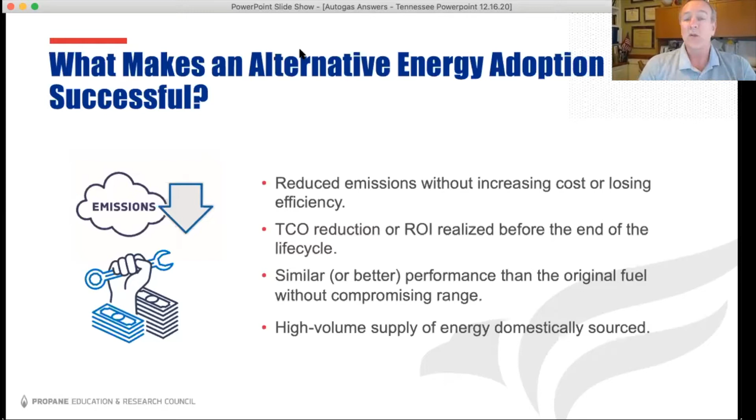It has to perform just as well, if not better, than what we're doing with our current gasoline and diesel today, without compromising on range. And then lastly, most importantly, we have to have a lot of this energy source available to displace what's currently out there.

So how does propane autogas measure up? We're going to show you today it's the most cost-effective way of reducing the most harmful emissions, NOx, across the whole spectrum. We have the lowest cost of ownership of any fuel, including the conventional fuels out there today. And we have at least as good performance—I think you're going to see actually increased performance—without compromising on range.

I'm hoping Billy will tell us about the tank sizes on his buses, because if he has those 400-mile range buses, then you don't even have to worry about it for the field trips and such.

And of course, we have more propane in these United States than all other countries combined. We are the leader in the world for propane production. We used 9 billion gallons of it last year, but we had a whopping export of 19 billion gallons. With all of you attending today converting your fleets over to propane, we're going to knock that down a notch by the end of today's session.

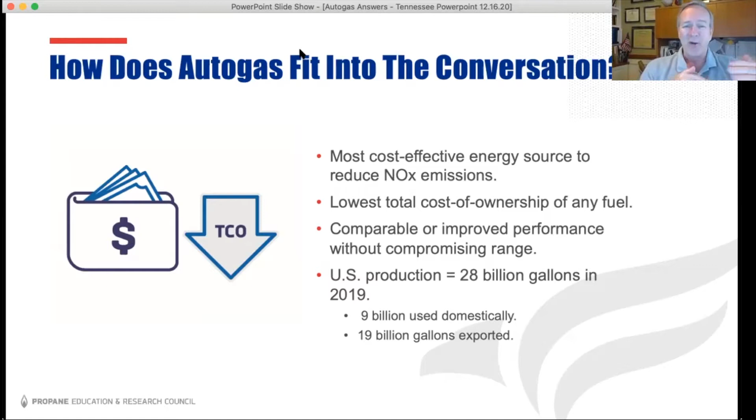So what is this propane autogas? Why do we call it autogas instead of propane—is it something different? No, it's exactly the same fuel that we have out on our patio firing up our grills to cook our hamburgers and steaks.

It's extremely clean, or we wouldn't let it touch our food. But we use it in millions of homes throughout the United States for heating and for agriculture on farms. Tremendous amount of use in forklifts for decades, because it's always been safe to use inside warehouses, since the emissions don't kill people like some of our other more dirty fossil fuels. And then it's in a lot of off-road applications as well, especially in the commercial mowers.

But it is the exact same fuel that we use. We have two sources of propane. One is an organic source, and that's the vast majority of where we're getting it, coming right from our own soil. But we also have renewable sources that we're going to talk about at the very end, on our pathway to zero emissions and greenhouse gases.

Both of them are the exact same molecular structure. They're non-toxic. It can't contaminate air, soil, or water because it doesn't spill. As soon as it hits the atmosphere, it actually evaporates, so you can't have any of that contamination.

So why are fleets choosing it? Well, it's about the money. That's at the top of the list. It's way less expensive than what we're using now, and it is much cleaner.

I'm hoping Billy will talk a little bit about the driver experience that he's having, because that noise is quite a new factor when folks are going from a diesel bus to a propane bus, because drivers actually get to hear what's going on their buses.

But of course, they have less maintenance. We'll talk a little bit about that. Improved corporate image - going green is very, very popular, but the employee morale for driving propane powered vehicles and that driver retention has been astounding. We'll get into a little bit of that too.

Every single alternative fuel has a path to zero emissions. Now, none of us will ever achieve really zero emissions, because there's an emission from tire wear, there's an emission from brake pads, there's an emission from everything on a vehicle that's moving down the road. But we're all striving to get as close to zero as we possibly can.

So how has propane measured up? Well, when we first got started, we noticed a huge reduction in particulate matter. This is something on a diesel bus where you have a particulate matter filter because that particulate is so dangerous to our environment.

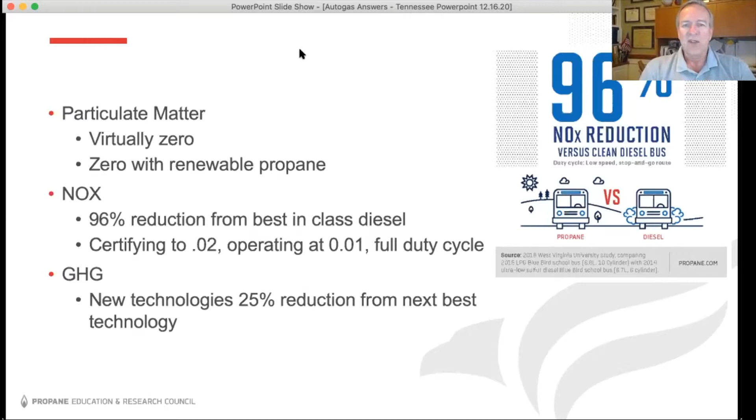Greenhouse gases is the other one. Our new technologies are making great headway in this with their efficiencies, and I'll talk about that when we get to it. And we are also doing a lot of headway with the renewable propane we'll get to.

Now, fuel and maintenance costs. Happy is going to be talking about fuel and prices, so I'm not going to steal his thunder, but it just gives you some ideas of how well it is. But I will talk a little bit more about the savings we have on the maintenance side.

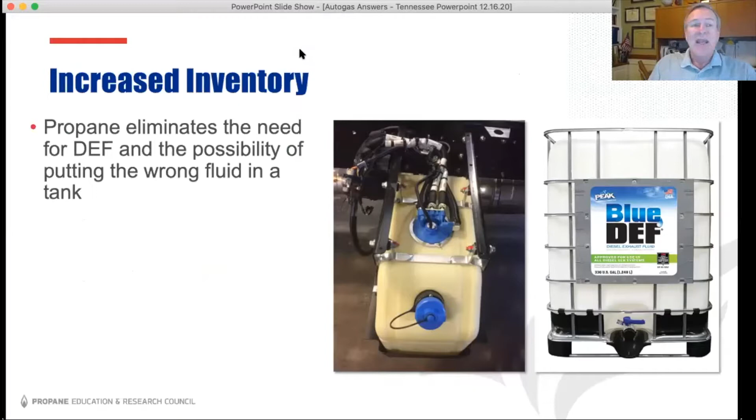Because with a propane bus, it operates so clean, we don't have to have all of the diesel after-treatment that our diesel engines are required to have to meet any of these particular standards, including the diesel exhaust fluid that gets mounted on there and all of the diesel emission reduction equipment that is necessary to make this happen on a diesel bus.

In 2024, there's a new set of lower emissions that these engines are going to require, and it's going to be even more equipment and more cost to maintain on diesel buses for the 2024 standards as well as the 2027 standards. Propane has already met the 2027 standards.

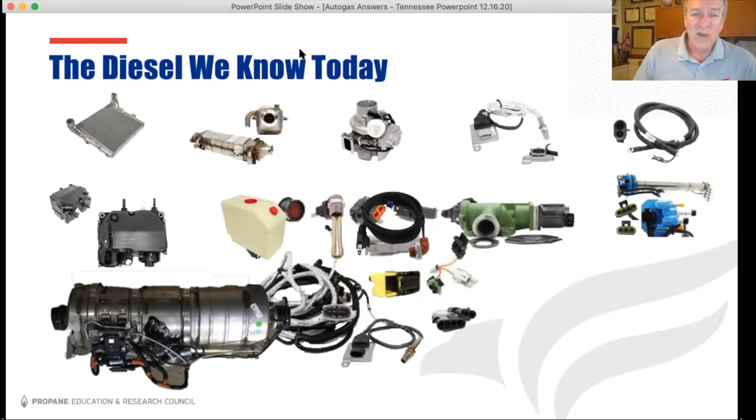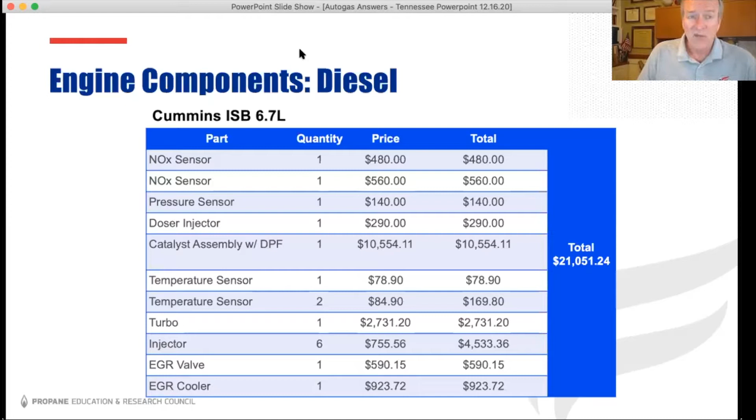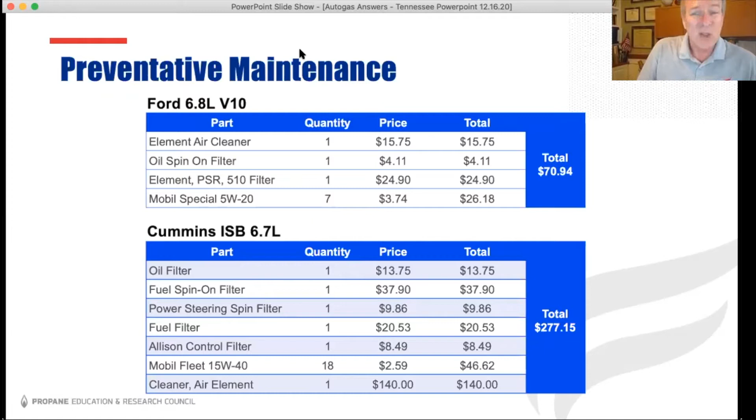It's that clean. To give you an idea of the cost, these components, especially that catalyst assembly for the diesel particulate filter, are very expensive when they need to be replaced over the life of the vehicle. Compared to a propane engine using 7 quarts of oil and a $5 filter, most diesel engines use anywhere from 17 to 30 quarts of oil with very expensive filters. So on that preventative maintenance comparison, we're saving about $200 for every oil change.

So what is the current offering of vehicles that we can do on propane? Well, I've always liked to say anything that runs with a spark plug, we can make it work with propane, and technologically we certainly can. But it's been implemented in a lot of law enforcement and a lot of shuttle vans and utility vans. We've been in a lot of mid-duty vehicles, especially school buses, and that's where we shine brightest.

These are some of the manufacturers providing solutions for vehicles with propane autogas. Roush CleanTech is one of them. They work in the Ford family of trucks, from that strip chassis for the step vans all the way up through the E-Series 350 and 450, into the heavy Class 7 33,000 GVW. And of course, Roush supplies Blue Bird with propane engines for their Type C buses and Micro Birds.

Freightliner Custom Chassis also has 2 different engine sources that both operate on propane. The Drive Force engine comes in an 8.0 or an 8.8 liter to take care of the Class 6 and 7 for those Freightliner Custom Chassis.

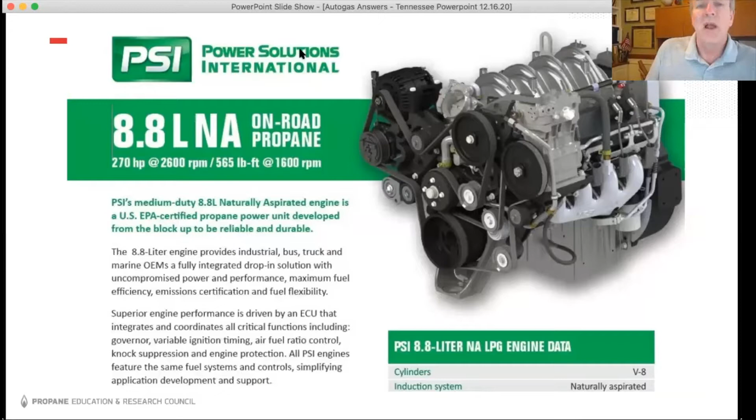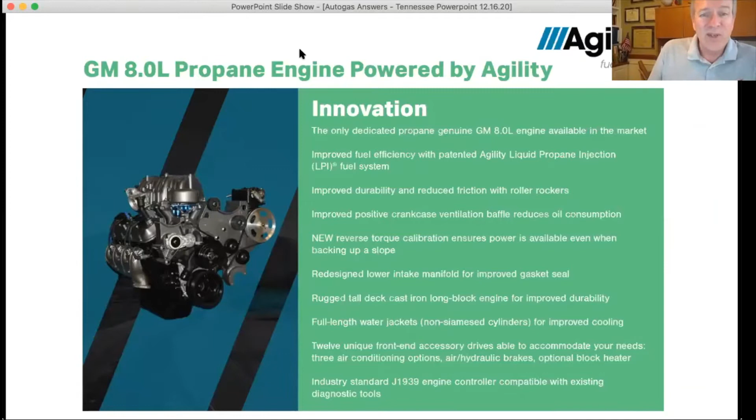Power Solutions International is one of those, and they just achieved the ultra low NOx emission standard for EPA and CARB—that's 0.02. Agility has the 8.0 liter, which is right next door in Salisbury, North Carolina. Greenkraft in California also has an ultra low NOx solution for their cab over configurations.

Alliance AutoGas—Happy is going to talk about this, so I'll go right on past it—along with ICOM and Campbell Parnell, are all aftermarket solutions that allow you to take existing gasoline vehicles in your fleet and convert them over to propane.

So where's the best success story that autogas has had? It has been in that school bus arena. All 3 school bus manufacturers provide propane as a solution. I was actually doing a program yesterday with the national sales manager for Blue Bird, and they announced that 2020 was an important year for them, because their alternative fuel school buses now surpassed their manufacturing of diesel buses. It was 48% last year, and this year it's going to be over 50% of their buses are non-diesel.

Now I've got to make a little change here because just this morning we got our numbers in, and it's not 20,000 propane autogas school buses in the United States like it was earlier in the spring. We're actually at 21,000 school buses now operating across the country in over 1,000 school districts. And when all of them are fully open, we're moving 1.25 million students to and from school every day.

CNG has about a 34% increase, but there's a substantial amount of money needed to make this happen in the electric environment. So much so that the Volkswagen school bus funding numbers are quite telling, with the blue being the amount of money awarded and the yellow being the number of buses deployed. You can see the right-side-up equation that propane has for reducing the most amount of dangerous emissions. I'll do a little comparison here as well.

Two states were studied over the last 15 years, Texas and California. California invested $816 million in funding for over-the-road emission reductions in the vehicle space and reduced 35,000 tons of nitrogen oxide.

Texas had a bit of a different approach, much like the Clean Cities approach. It's an all-of-the-above answer in the alternative fuel space, depending on whether it's a passenger electric vehicle, a CNG tractor trailer in that Class 8 environment, or propane in that mid-duty space. They had that all-of-the-above approach and were able to reduce almost twice as much nitrogen oxides with substantially less money.

So what are we doing with propane now? What's that next school bus success? It's in the area of medium duty, Class 3 through 7, because they use a lot more fuel. And as you know, with propane being substantially cheaper than gasoline and diesel, the more fuel you use, the more savings you're going to incur.

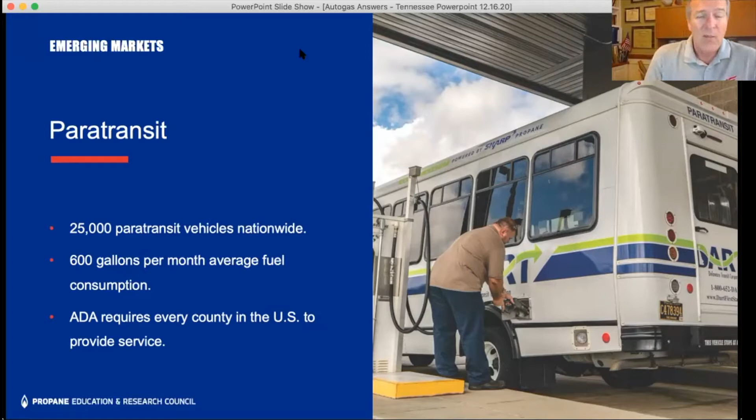Paratransit is another one. Just to give an example, the shuttle buses that are deployed—we're actually going to be talking about them in a little bit with one of our panelists, Candace. The amount of fuel those shuttle buses use is about twice as much as what school buses use, because they're operating more during the day than the back-and-forth frequency of school buses.

One of the highest users is in that parcel package delivery space. We've seen even in Alexis's slide UPS's adoption of alternative fuels, of which they have over 1,000 operating on propane, along with FedEx Ground and DHL.

But the United States Postal Service has independent contractors that move the vast majority of their mail between distribution centers and hubs. They have lots of trucks, and 10,000 of these box trucks are operating around the country every day, 6.5 days a week, day and night, using over 1,000 gallons of fuel per truck. So if you want to make a huge difference in your fuel cost savings as well as your emission reductions, that's a great way to go. And they're in every zip code of these United States.

So we have calculators that determine how much you can potentially save in the future. But what I wanted to do this year is some forensic historical study—case studies to actually measure exactly what the costs were to operate these vehicles.

This is just one of about 7 studies I completed this last year, going back over 5 years and collecting every single maintenance record for a set of trucks, exactly the same year, one on diesel and one on propane, in the same company, operating in the same area, with the same weight and the same duty cycles—adding up all the maintenance costs and all the fuel costs. In this particular case, for that Class 7 bobtail truck, it's 29 cents per mile cheaper.

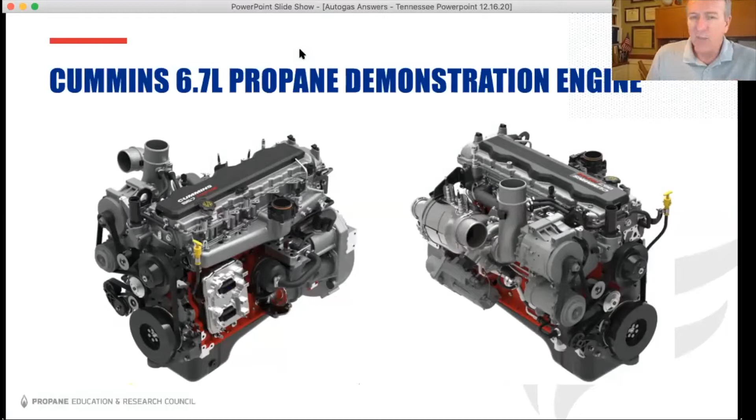And so they did, and they surprised everybody with how well this thing performed. High compression ratios equate to high efficiencies, and those efficiencies also equate to very low greenhouse gas emissions.

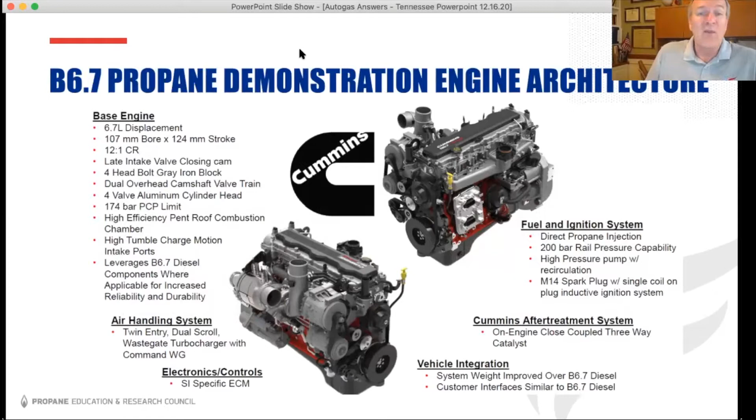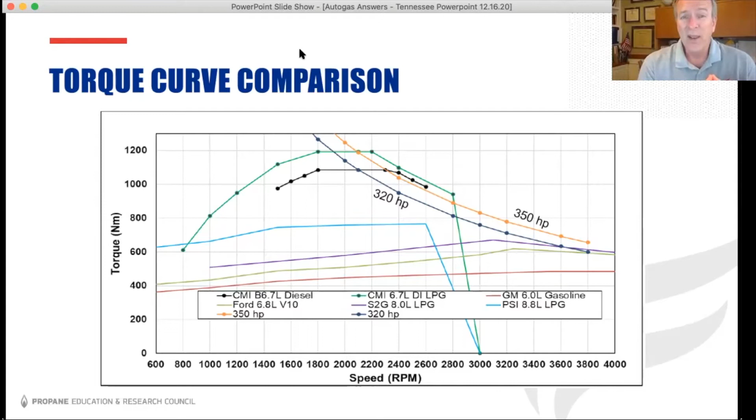But what happened with propane is something that's never happened before: we actually beat diesel in horsepower and torque. And this is very scalable—it's not just for the 6.7 liter, it can go on any of those Cummins platforms. We got up to 375 horsepower and 880 foot-pounds of torque, surpassing diesel's performance.

So now what are we doing with the fuel as far as innovation and moving forward? Well, 10 years ago, if you remember, we were doing carbon reduction goals in just a few states where legislation was passing. Fast forward 10 years, and now over 50% of the population of the United States has legislative action in place to reduce their carbon footprint in their states.

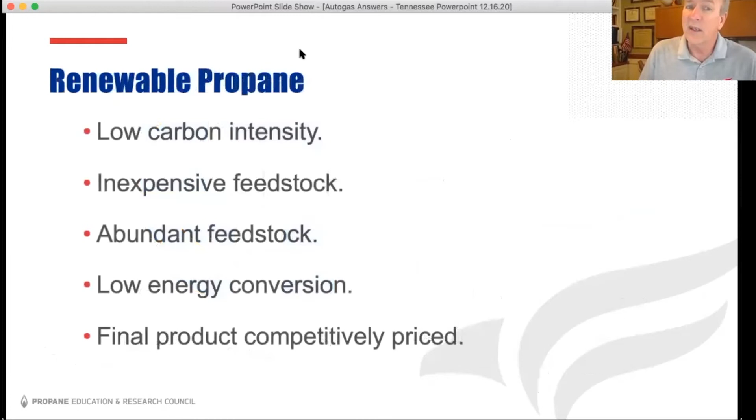So we knew that now with renewable propane, there are a lot of advantages. We're manufacturing it in Louisiana now, with REG at the top of the list, producing 5 million gallons a year. Renewable DME, which is blended with propane to provide a carbon intensity score as low as 11, is happening a lot in Southern California right now with dairy waste.

But let's do a comparison now of greenhouse gases throughout a life cycle—a life cycle analysis. Because electricity is considered the cleanest of all transportation energy sources, we're going to use that as our baseline for comparison.

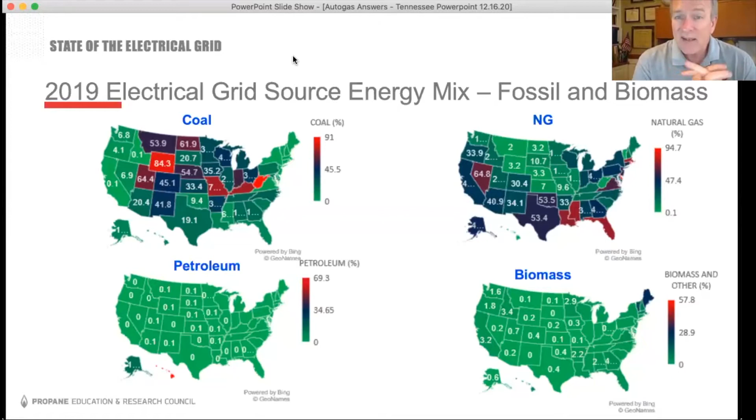So where does the grid get its energy source from? We can look at the map here, and each state has its own comprised recipe. As you can see, Wyoming, West Virginia, and some others have a very high concentration of coal feeding their electric grid. You can see other states where natural gas has a much higher percentage, with not much on the petroleum or biomass side.

What are the renewable sources for the grid? Well, nuclear is one of those. In my home state of South Carolina, and also in Tennessee, we have a pretty good amount of nuclear going into the grid, but not much more nuclear is being added. Hydro is extremely popular in the Pacific Northwest, and it's very clean, but not too much new hydro is on the horizon either.

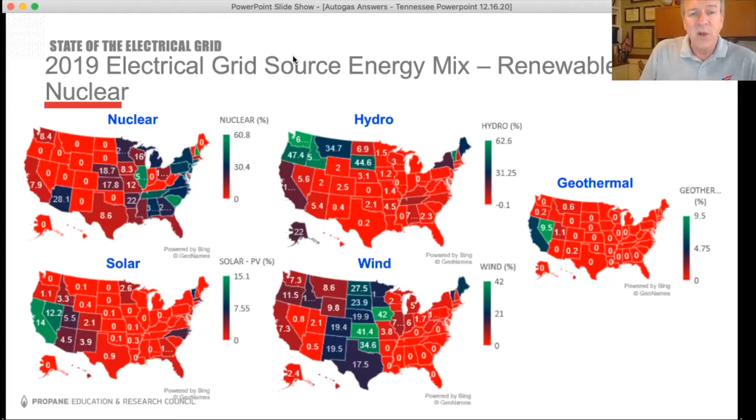We have a certain amount of dams and rivers that we can use. Solar, obviously in the California and Nevada areas, is prevalent, and we have wind going through the middle states of our country. Not much on the geothermal side.

So let's add it all up and do a comparison. On the left, we have our regular conventional propane, with a range of 79 to 83 on the government's carbon intensity scoring, okay? Then we look at the electric grid, with government-assigned carbon intensity scores as well. We can look at Tennessee with a carbon intensity score of about 130, compared to 79 with conventional propane.

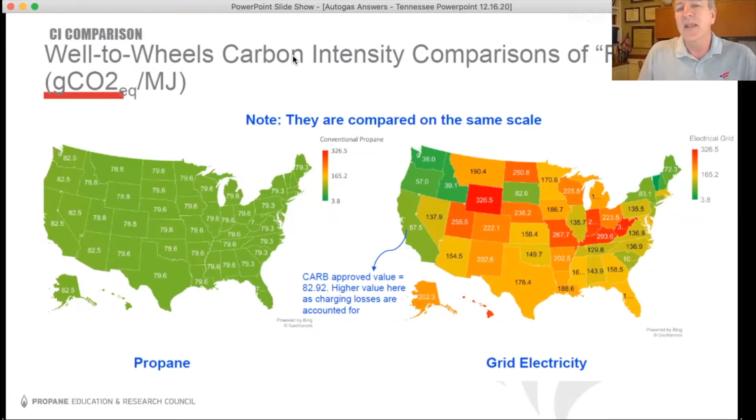So how does this translate into greenhouse gases? Let's take a look at 5 quick case studies. Each of these compares one Class 7 box truck moving 200 miles a day—one powered by propane, one powered by the electric grid into batteries in a vehicle. On that one-to-one comparison over a 1-year period, the numbers in each of these states reveal how many tons of CO2 differential there is between the two.

For example, in South Carolina where I'm at, the electric grid is going to provide 4 tons of CO2 emission reductions compared to a propane vehicle of the same one. In Tennessee, your electric grid, because of that, you're going to have 49 tons of CO2 emissions cleaner operating with conventional propane than you will off of your electric grid.

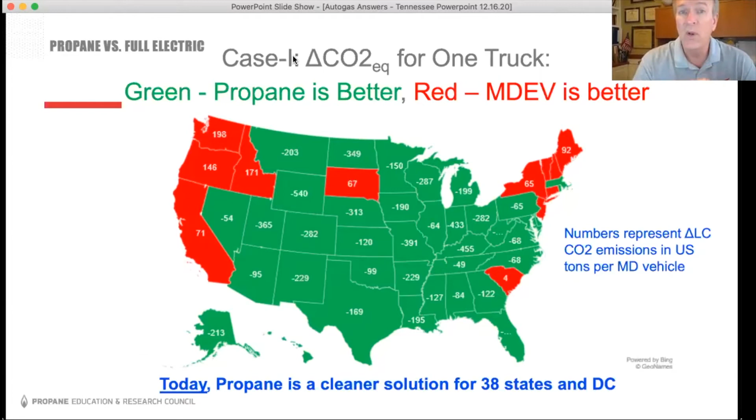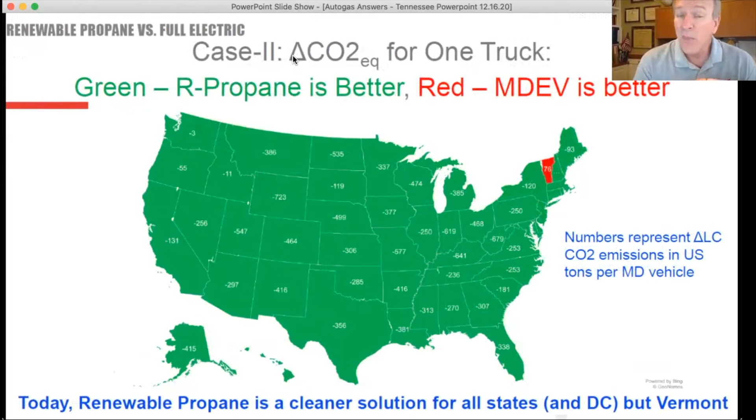So when we go and actually introduce renewable propane, you can see how much more drastic it is in its greenhouse gas reductions compared to the electric grid in each of these states. When we use renewable DME, it's even cleaner. But when we combine our best case scenario of renewable propane blended with renewable dimethyl ether or renewable DME, we have astounding carbon reductions of CO2.

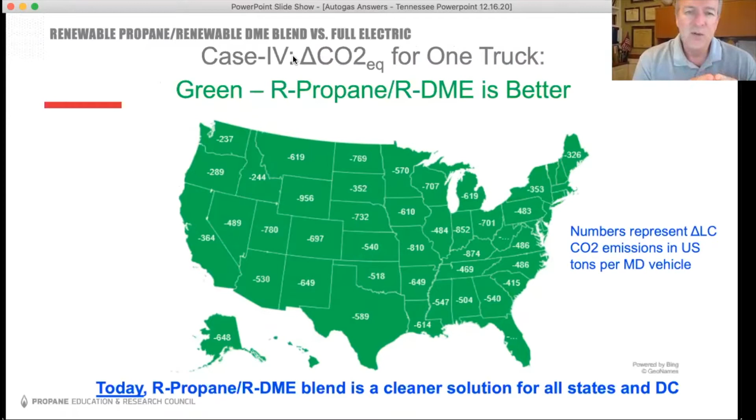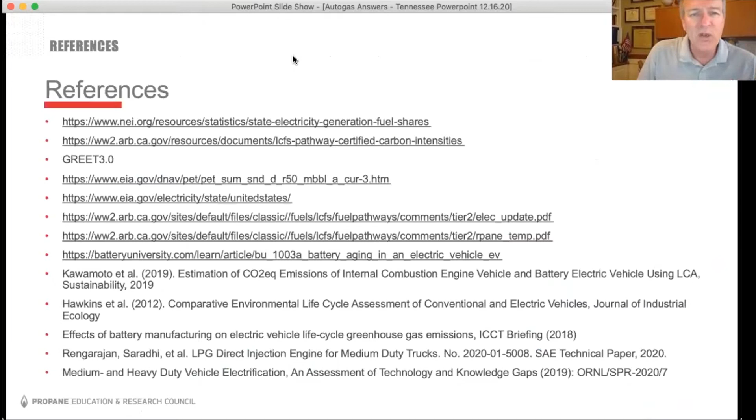If you want to compare all this, since this is being recorded, you can check all of the sources for measuring how we came to those conclusions. Speaking of conclusions, this is it.

The benefits of propane and renewable propane is extremely cost effective. If you look at any incremental cost to move away from gasoline and diesel, you'll find that propane has the lowest cost of all. Averages about 15%, sometimes it's on parity with diesel, but it's very sustainable because of a low incremental cost that's overcome with fuel savings very easily.

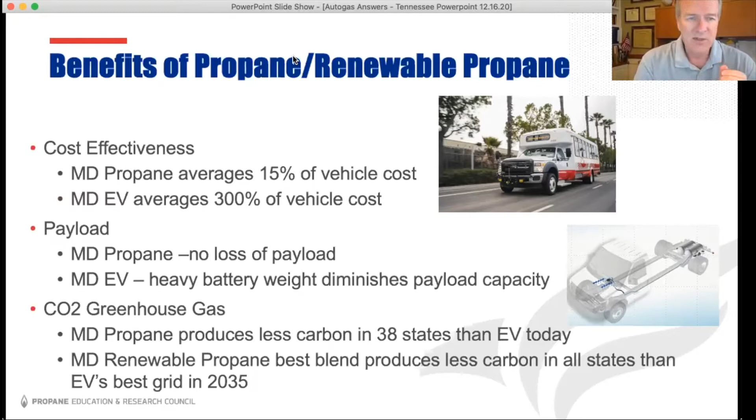And we do this with no payload loss, especially on the larger vehicles where it gets much heavier with alternatives to move that heavier vehicle. We don't have any payload loss at all. And of course, we reviewed the CO2 greenhouse gas emissions quite thoroughly.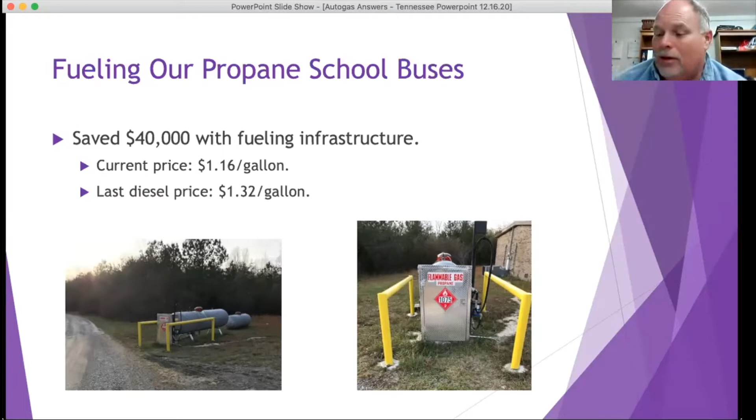So we've only had our buses in operation for around 5 months. So to give you a long-term cost, I don't have that to share with you at this time. But as time goes on, I'm keeping track of it, and hopefully I'll have more information as time progresses. That pretty much sums it up for me.

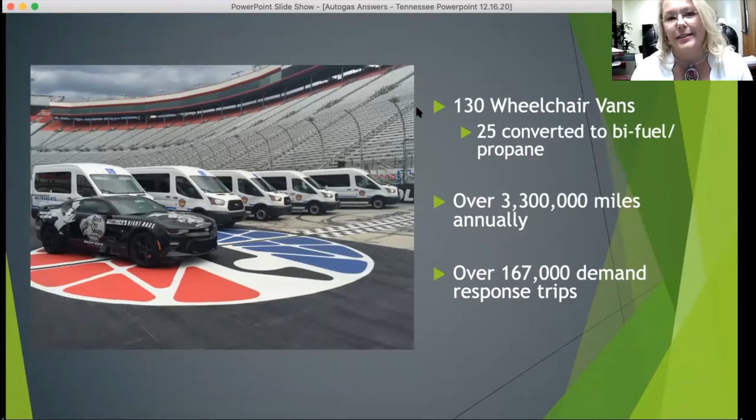We travel over 3 million miles a year, transporting over 167,000 people. So as you can imagine, we purchase a lot of fuel. So we were looking at ways we could reduce our operating costs, and that was the beginning of our Alternative Clean Fuels program.

We chose propane autogas because it's better for the environment, it's less expensive to operate than gasoline, and there was no large upfront cost for us to get the fueling system in place. We purchase 220,000 gallons of gasoline each year and over 50,000 gallons of propane. Since propane is about $1 less per gallon, that gives us the opportunity to reduce our operational costs by about $50,000 per year.

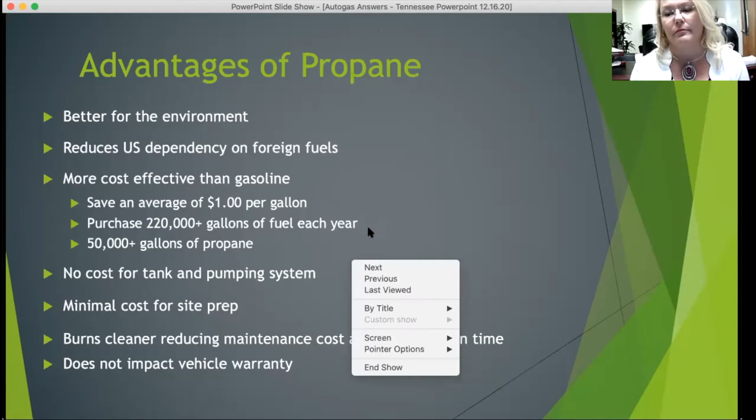There were some obstacles along the way as we started our program. East Tennessee doesn't really have fueling infrastructure for propane autogas, so we partnered with Alliance AutoGas to provide the tank and the pumping system.

The first phase of our project was Carter County, and we provided the site prep: a 5x10 concrete pad, electricity, and safety bollards. We were able to go about doing that a little bit creatively as well. I contacted the Carter County Mayor and inquired about having the trusties from the local jail provide the labor at no cost, and then we just provided the materials.

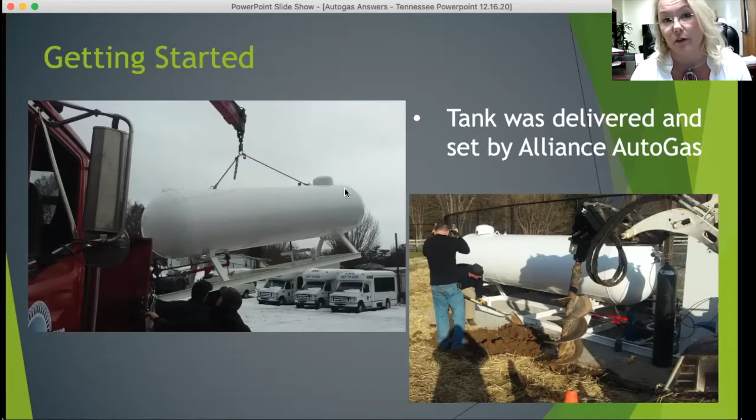Phase 2 and phase 3 of our projects were Greeneville and Kingsport. For those projects, we did community partnerships with Alliance AutoGas and other entities in the community that wanted to convert their fleets over to propane as well, so that we could share fueling infrastructure.

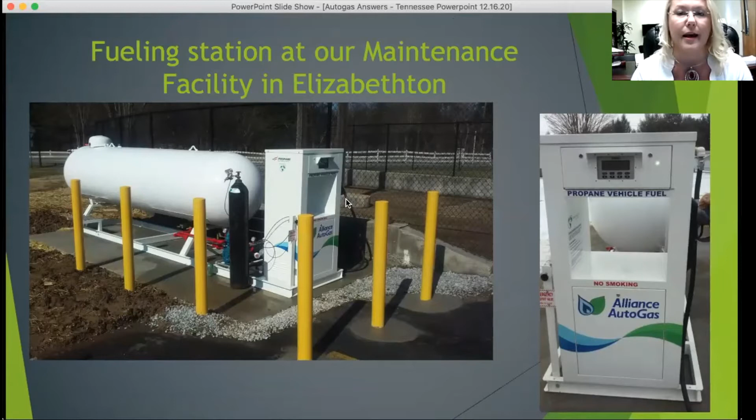The tanking system looks very similar to a regular gasoline pump. The driver pulls up, connects the nozzle, and operates it just the same as they would if they were fueling with gasoline.

We had our mechanics trained to actually install the kits themselves. They traveled to Swannanoa, North Carolina, where they went through about 60 hours of training to install the conversion kits, and then an additional 10 hours of training to learn how to properly maintain everything.

The drivers received 2 hours of training on how to operate the pumps at the various locations, locating the emergency shutoff valves, the fueling process itself, and various other safety videos.

Each tank of propane will last us about 300 miles, and of course we operate a lot of miles in a day. So we set our vehicles up to be bi-fuel, so they'll operate on propane or on gasoline, and the vehicle switches over automatically. There's not any interaction needed by the driver.

The drivers have reported back that they don't notice a difference. They can't tell if they're operating on propane or gasoline unless they look at the indicator on their dashboard. They've also reported that there's not any change in the amount of power they have while operating on propane.

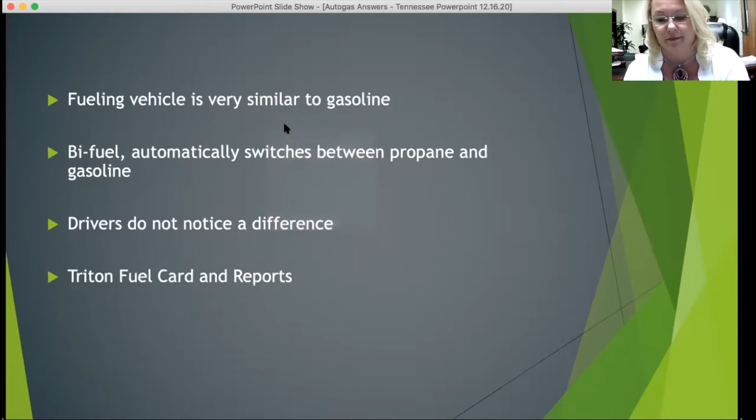Our fuel cards work just like our other fleet card programs. They give us the same capability. We can see the date and time that the drivers purchase gasoline, the amount of gallons, and all of the same information as other fleet card programs.

In 2015, when we started our project, we projected a net cost savings of $9,000 per vehicle over a 5-year period. We are pleased to announce that we have exceeded those projections by approximately $200 per vehicle.

I know everyone's super busy. We all have a lot of things pulling us in different directions throughout the day. So the thought of taking on a project of this magnitude might seem overwhelming, but I can assure you that it is not. The amount of time and effort that goes into the project is outweighed by the benefits ten times over.

I would encourage anyone that's considering the project to look for community resources that are available to assist you, and to make sure that you engage your funding partners, your board of directors, the media, and really generate a lot of excitement and good attention for your organization.

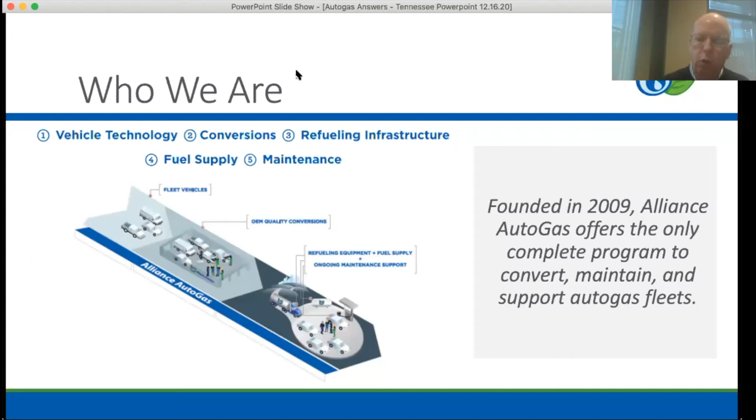In 2009, Alliance AutoGas was founded. Basically, the program from Alliance AutoGas through Blossman was to provide a complete program to help anyone considering or looking into an AutoGas program for their fleets. So we don't have to be involved in every area, but we offer the services to be involved in every area, whether it's vehicle technology and conversions, refueling infrastructure and fuel, or maintenance and ongoing support once your AutoGas program is up and running. So that's one other brief intro on us before I get into other details in the infrastructure portion.

Our systems are all EPA certified. That is critical, as Steve mentioned earlier, and as Billy and Candace have mentioned. EPA certified is going to guarantee that that system is reducing emissions being emitted from those vehicles or those buses. The other EPA certification helps with is, as Candace and Billy both have done, if there's grants or funding available, that will help to be able to connect to that grant or funding to certify that you're providing an advanced alternative fuel to reduce emissions.

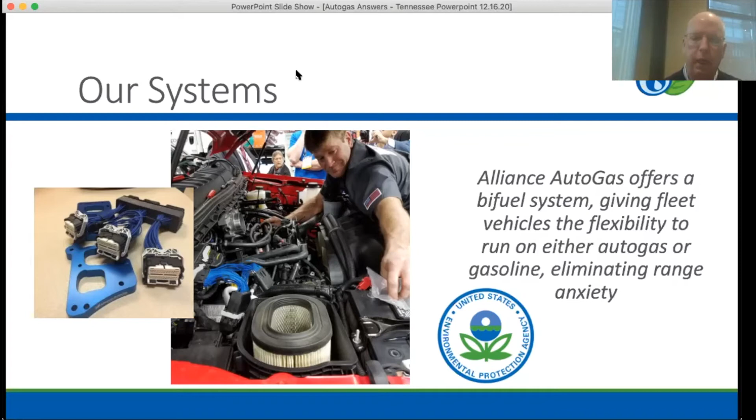Our systems are bifuel, as Candace mentioned. Billy talked about earlier on the buses. Those are a dedicated propane system, which work great. On our systems, as Steve mentioned, we're after the market. So our systems are going to start on gas, and then when they get to operating temperature, they're automatically going to switch over to being powered by propane. And then when it runs out, it's going to automatically switch back over to gas should you run out. It's just a continuous program each time it goes through that same cycle of starting on gas, automatically switching over to propane.

A lot of the different vehicles that people look at or that you may want to consider for your fleet for an AutoGas program include law enforcement vehicles. These could be sedans or SUV vehicles equipped for law enforcement fleets. Another segment is service and delivery vehicles - mid-sized sedans, or possibly smaller SUV vehicles, maybe used for service, for inspections, for route deliveries, etc.

One of the bigger segments is the standard trucks and the transit vans, like Candace and they operate at NetTrans. These vehicles can range from the F-150 up to the 750. These can range from the Chevy vans, GM Express vans, and Dodge Ram vans, etc. So whether it's any of those vehicles, they can be adapted to be equipped to operate within an AutoGas program.

Another key component would be the upfitted vehicles, whether it's an E-Series truck, an F-Series, a utility body, or a special body like you see in this slide here for a bobtail. These all can be equipped to be powered by propane. Again, these are all bifuel systems. They come with a service warranty, etc. But you can see in this picture here, there's the big bobtail on the back carrying the propane, and the white cylinder you see on the side is a propane tank used for fuel for this vehicle.

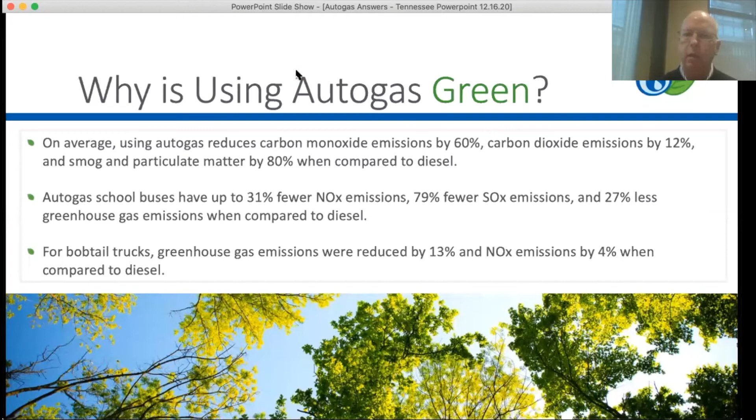We have it active, we change it regularly on our website at Alliance AutoGas, so you're able to check and see what the fuel price is in that area. Again, it's an average price. As Steve and others have mentioned, it's generally about 30% cheaper than gas, even more than diesel. Years ago, that price difference was a little bit higher - maybe $1.50 or $2 difference. Right now we're under compressed pricing, but we're still able to offer savings, as you saw in Billy's slide earlier, compared to diesel.

One quick testimony before I jump into the AutoGas infrastructure portion: one of the neatest stories is about having a reliable emergency fuel. When we're able to talk to a transit agency, law enforcement, or a service delivery company, when there's disruption in the power supply or disruption in the pipeline, we're able to provide services and accessibility to fleets to continue to operate their program, to help provide supplies and move people out of harm's way. It's just a great testimony of service for an AutoGas program that we're really glad to be a part of.

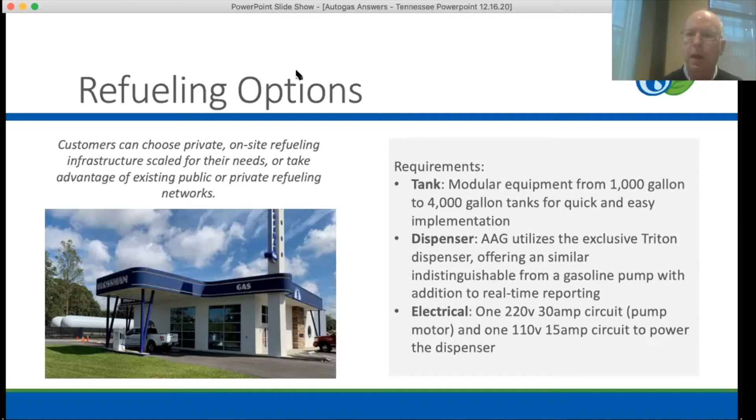So this is a picture of one of our branches. We have one in Maryville, Tennessee that has a 24/7 refueling site. It's easy to refuel, it has the Staubli Quick Connect nozzle, and it has 24/7 availability, generally covered and lit. If there's ever an issue, one of our staff members is generally there during business hours to be able to provide service. But we have many different fleets that do take the option to refuel at our branches.

Another refueling option is on-site at your facility. Candace Long has this at their site in Elizabethton. Kingsport also has on-site fueling at their facility in Kingsport, Tennessee. Basically, it operates a centralized source for your fleet to be able to refuel. It gives you control over it. We, or your other service provider if you had another one, would come to that site to maintain and provide service, and refuel your tanks there on site so you can refuel your vehicles.

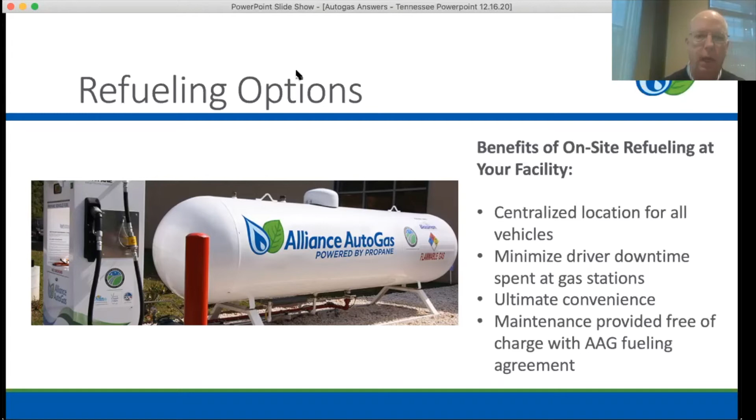When we own the equipment, which is a lower cost for you all, we do all the maintenance. We're in charge of making sure that tank, the connections, the pump, the motor, all of it is kept up to date, filters, and kept up to running speed without any disruptions. It's just one simple call to make sure that site can be maintained.

Here's a picture where we were at Kingsport. This is a site that is going to be used by the city of Kingsport. It is a primary source for NetTrans to be able to refuel there. This is a joint venture with multiple entities. U-Haul is involved because this is at a U-Haul site, NetTrans is involved because they refuel there, and the city of Kingsport has their refueling on the other side of town. So this worked out to be a great partnership for all of us involved. This is a card reader system, so with this system the drivers are able to refuel there, and whoever refuels there, it is charged to their specific and individual accounts.

So to get into a little bit more detail on the dispenser part, all vehicles required in on or after January 1, 2020 are required to have the Quick Connect filler valve and the Quick Connect nozzle. With that nozzle, no safety protection is required.

You run the card through the card reader system, put in your driver number, vehicle number, and mileage. That way we're able to share the data with you for each refueling, and then you connect the nozzle to the vehicle.

Once it's connected, it's going to feel very similar to gasoline and diesel. When that tank is full, it's going to shut off just like other systems do, and then you simply disconnect the nozzle and hang it back up on the meter.

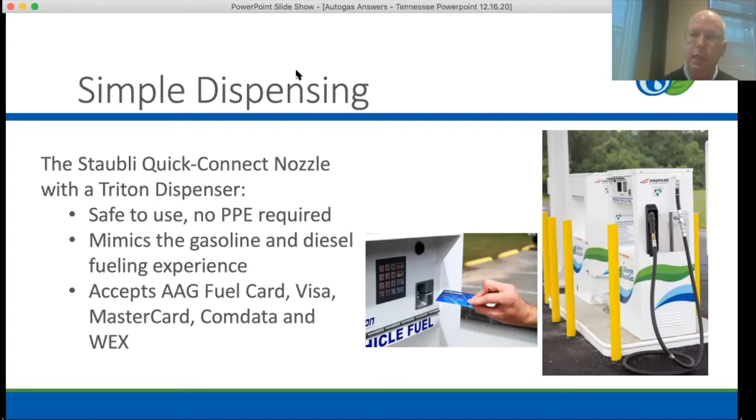Another site where we have shared refueling with NetTrans is in Greeneville, Tennessee. And then we have other sites in Tennessee where we have shared refueling as well.

And we're looking at 2 or 3 other sites now where we can help them refuel. We want to be known as a service provider, so anything that we can do to assist a company, a business, an entity with their program, that's what we're all about.

To close, real customers and referrals have been the highlight of business and my work in Tennessee. Specifically, it has been great to work with Jonathan and East Tennessee Clean Fuels. Candace has been a wonderful provider for NetTrans, and we have been glad to grow and expand with their program.

And certainly, if you need another resource, Steve Hightower with Kingsport has been a champion and a great ambassador for propane autogas. I think they have well over 100 vehicles now in their fleet, and they've had a program for a number of years. They were one of the leaders. So if you need to reach out to see a facility, or talk to someone other than on the panel today, Steve Hightower would be a great resource.